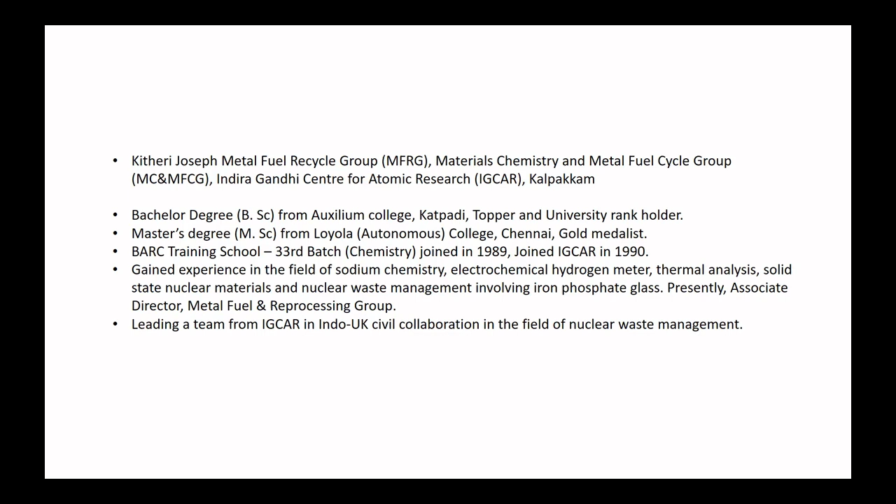So you are, did I pronounce your name correctly? One who will teach us how we take the nuclear fuel from light water reactor to fast reactor. When I was working in BARC, that time we had all light water reactors and fast reactor was being built in Kalpakkam. So now that is the next step you are going ahead.

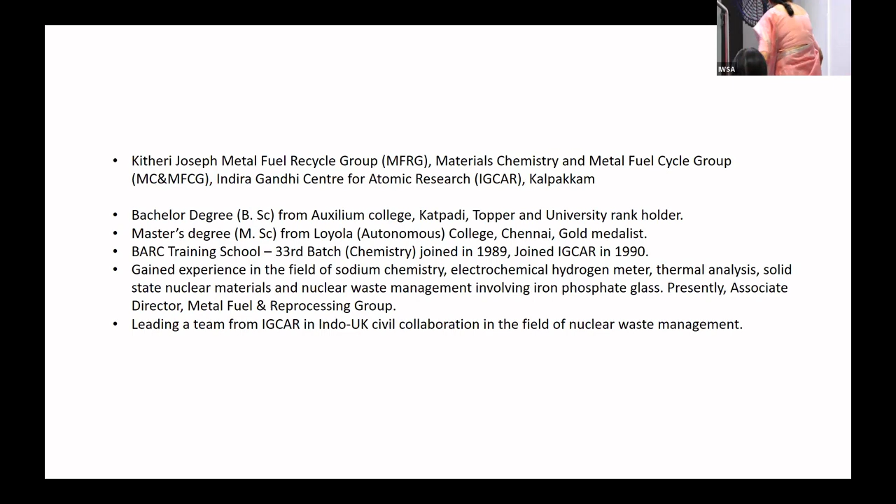And let me read a little bit of your biodata. Kitheri Joseph, Metal Fuel Recycle Group, materials chemistry and metal fuel cycle group here, and Indira Gandhi Center for Atomic Research, IGCAR, Kalpakkam. Somehow we think IGCAR is an extension of BARC.

So you did bachelor's degree from Auxilium College, Katpadi, and you were the topper and university rank holder. Congratulations, my dear girl. Master's degree from Loyola, Chennai, you are a gold medalist. Wow, so always a topper throughout.

And BARC Training School 33rd batch of chemistry joined in 1989. So I am from 12th batch, so most probably I might have taught you Fortran, I don't remember, or not. Normally it was a routine for me to teach Fortran to all training school youngsters, so that's okay.

Then you joined IGCAR in 1990 and gained experience in the field of sodium chemistry, electrochemical hydrogen meter, thermal analysis, solid state nuclear materials, and nuclear waste management involving iron phosphate glass. Presently, you are the Associate Director, Metal Fuel and Reprocessing Group. Once again, congratulations for that, because being Associate Director is a no mean feat in a man's world.

Now, is it a man's world or is it going to be women and man's world together? That change has to be there. When we were there, it was totally men's world, and somewhere we were hiding here and there, and they were trying to be very gallant to us. I remember, don't walk too fast, Mrs. Mahajan, we have to open the door for you. Arey, what is this? I can open the door myself. It used to be like that, but I'm so happy that now it has become equal, men and women.

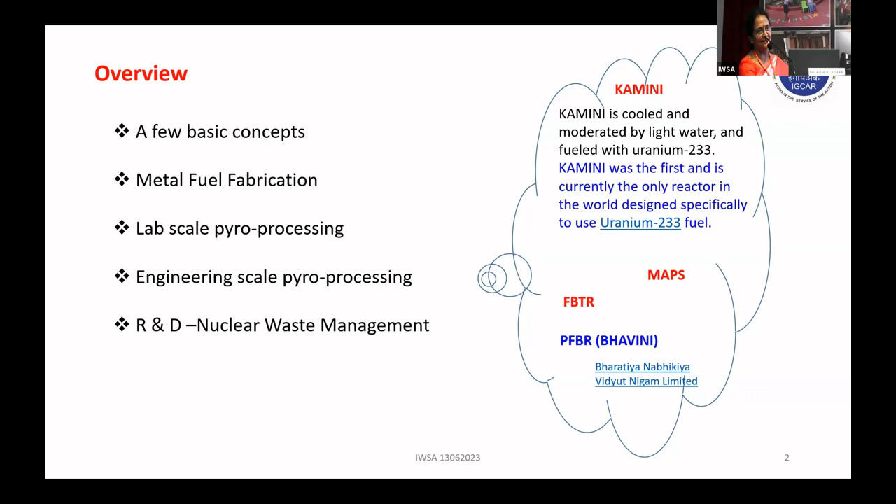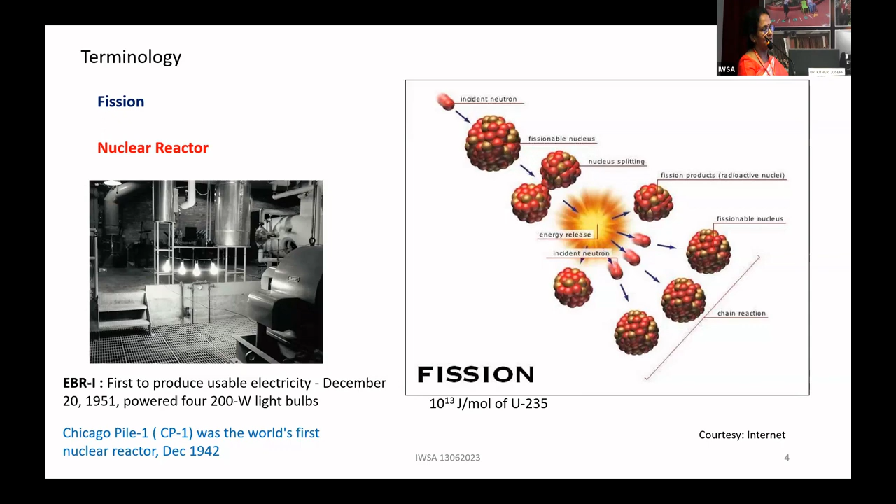A few basic concepts which you all know, that fission is through which we get the energy. I'm not going into the details of that, but since we are interested in breeder reactors, that is fast reactors, the first experimental breeder reactor EBR1 was constructed in December 20, 1951 to power four 200 watt light bulbs. That is the actual history. You can see now where we are. And the first reactor as such is Chicago Pile, which was in 1942. And I go into my topic straight away.

As I've informed you, we are interested in metal fuel.

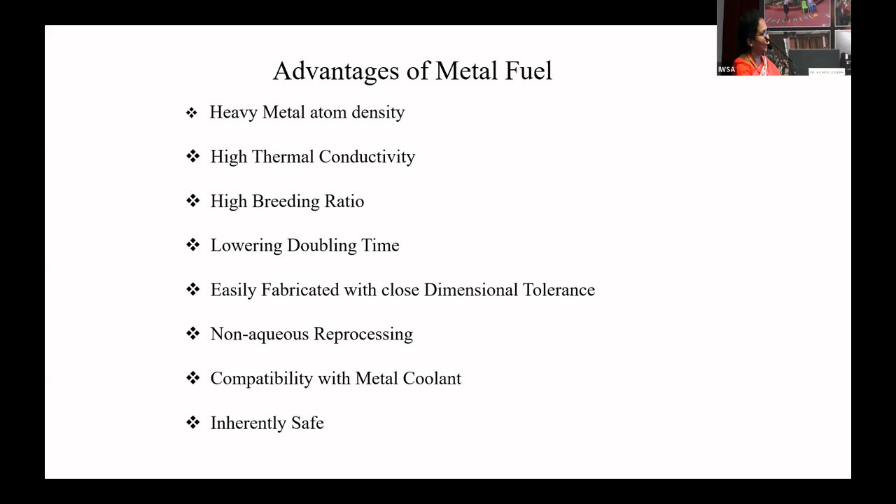What are the advantages of metal fuel? Heavy metal atom density, high thermal conductivity, breeding ratio is higher than oxide fuel, lowering of doubling time, easily fabricated, and it can be made with close dimensional tolerance. We go for non-aqueous reprocessing, compatibility with metal coolant which is sodium, and above all, it is highly inherently safe.

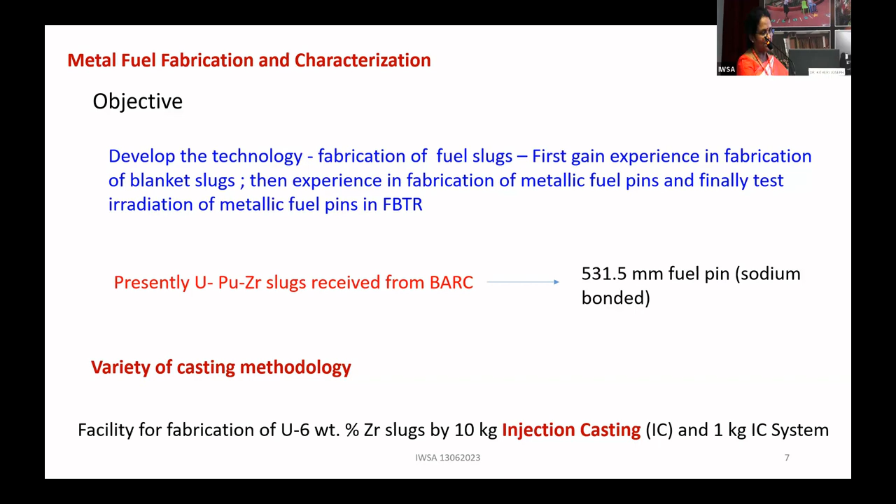What do you mean by injection casting system? Just imagine yourself having a cup of soup or juice, and you're trying to pull it through a straw. That's the basic methodology you can think of. But the entire process happens at very high temperature under closed environmental conditions.

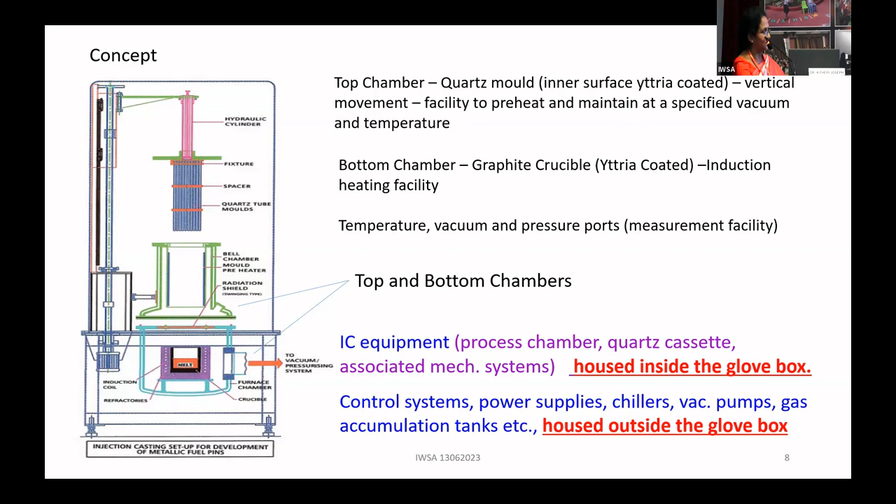The process consists of: yttria coated graphite crucible. Yttria is the most stable oxide which will not interact with uranium, plutonium, and zirconium, so you coat it with yttria - that has its own technology. Then you have a quartz tube which will be inserted at 1450 degrees. The internal diameter, 6 mm, should be coated with yttria on the quartz.

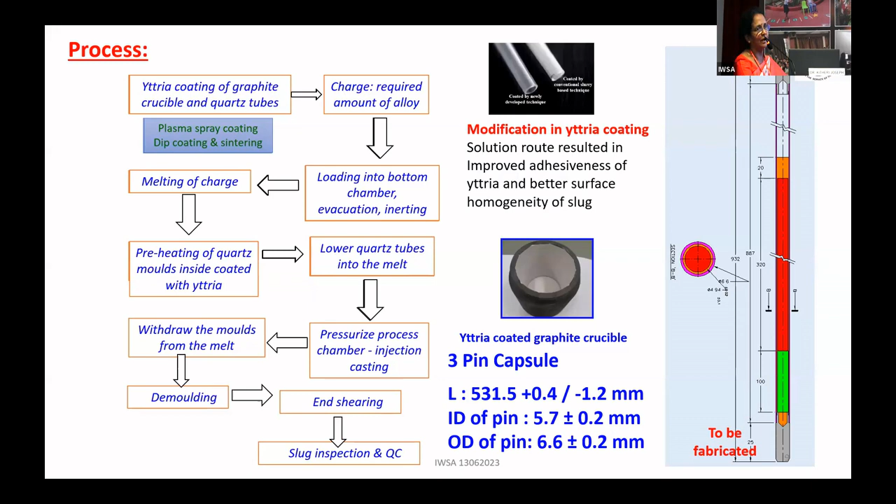All this process has been done inside IGCAR only. Finally, you pressurize the injection chamber, allow the melt to rise inside the quartz tube, and then cut it open to get the slug. The moment you get the slug, you have to go for quality check: metal feed, induction melting, demolding, characterization.

You should have physical, chemical, as well as metallurgical characterization. The moment it is not qualified, you recover the metal and redo the casting. If it is qualified, put it in T91 clad tube, sodium extrusion, slug loading, end-plug welding, sodium bonding. The fuel pin is characterized again, and the accepted fuel pin goes for assembly.

As you can see, uranium cleaned one is shown here, and the slug which is cast, uranium zirconium slug, is also shown here. For non-metallic impurities, oxygen should be less than 85 ppm - actual spec is less than 100 ppm - and carbon needs to be less than 5000 ppm as per specification, but what we get is less than 1000 ppm of carbon.

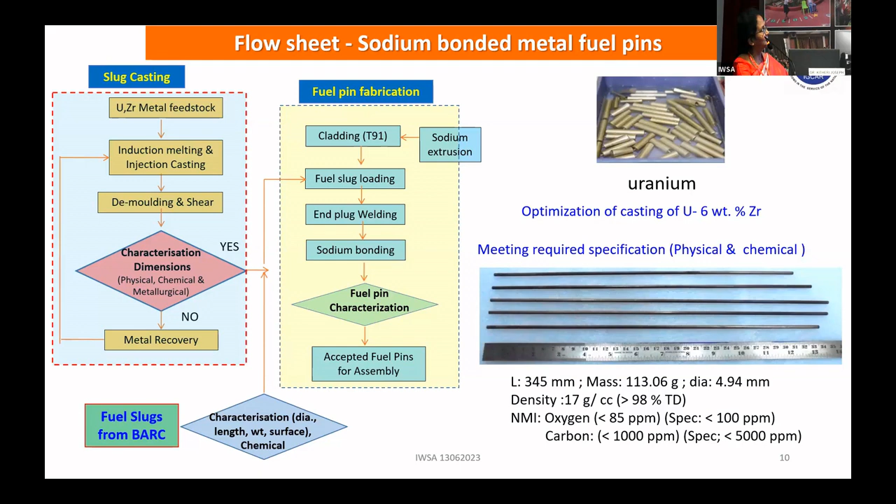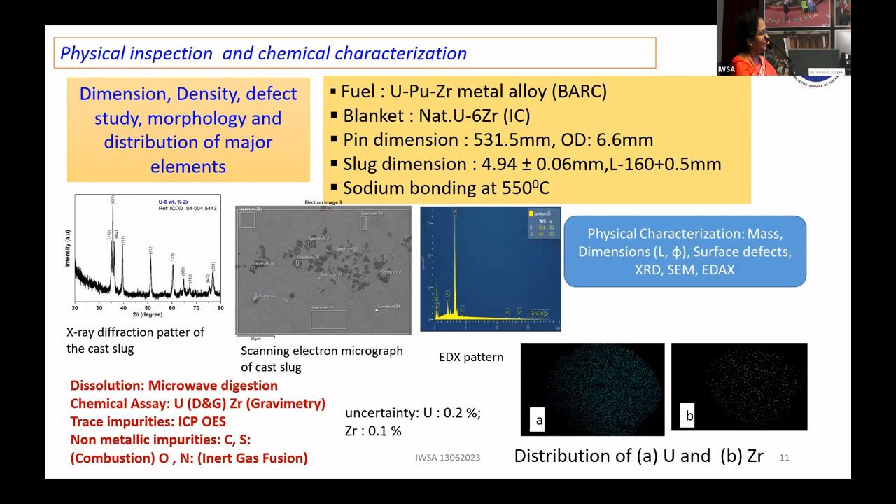As I mentioned, we need to go for all the characterization: XRD to check whether it is UZr, U-6%Zr, metallurgical characterization, and checking dimensions and surface - everything, including mapping the distribution of uranium and zirconium to prove it is uniform. In addition, we do chemical analysis of the ensured material. The uncertainty in uranium is around 0.2%, and the uncertainty in zirconium is around 0.1%.

Next, we show the entire system. The 1 kg injection casting - all trial runs used copper - and we have one more 10 kg system also. Sodium wire extrusion, sodium bonding, slug retrieval facility, and the characterization lab for non-metallic impurities.

Cutting and polishing machine, all inside the glove box. You can see the molten alloy, how it looks at 1450 degrees centigrade, and the entire system needs to be under high purity argon. So you require an argon recirculation and purification system, with oxygen level needing to be less than 20 ppm.

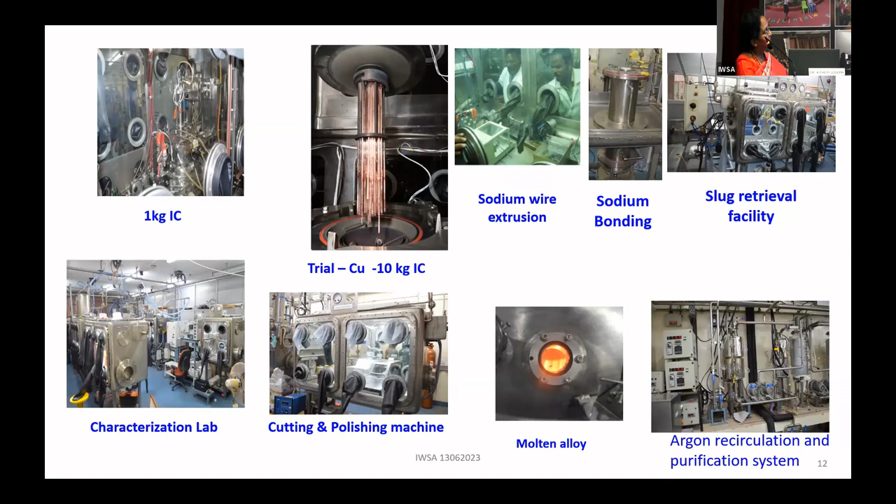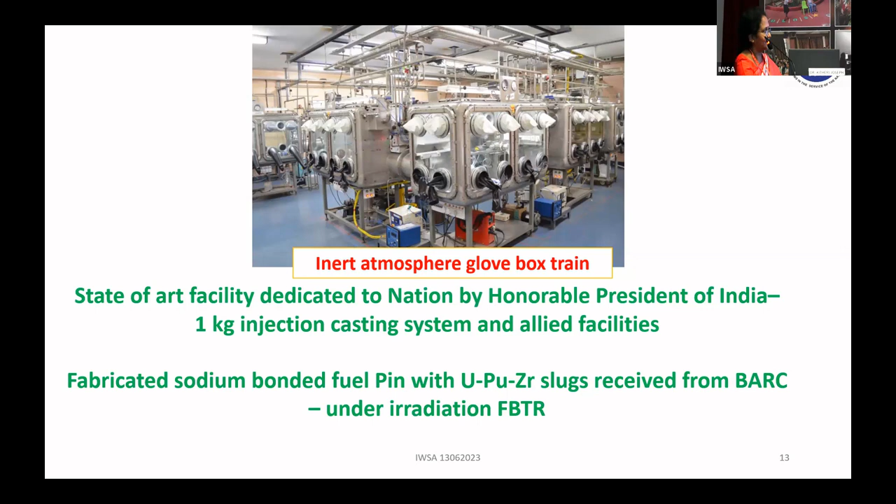This inert atmospheric glovebox train has already been dedicated to the nation by the Honorable former President of India, Shri Pranab Mukherjee, along with the 1 kg injection casting system and all allied facilities. We received the U-Pu-Zr slugs from BARC and made U-Zr blanket slugs, which are now under irradiation in FBTR.

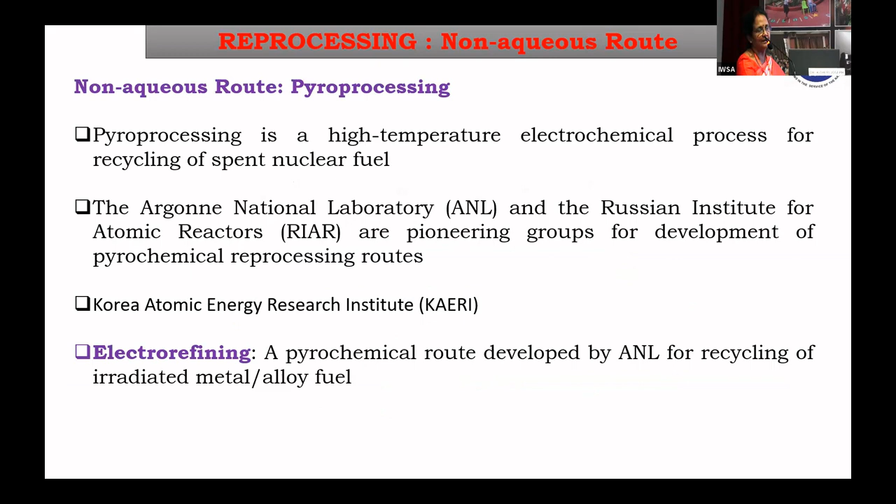The next topic is pyrochemical processing, at lab scale and engineering scale, which is a non-aqueous process based on electrochemistry, specifically electro-refining. The fission-product-containing spent fuel is taken in the anode basket, and depending on chloride stability, lithium chloride, potassium chloride along with uranium chloride are taken as the electrolyte. You have a solid cathode as well as a liquid cadmium cathode.

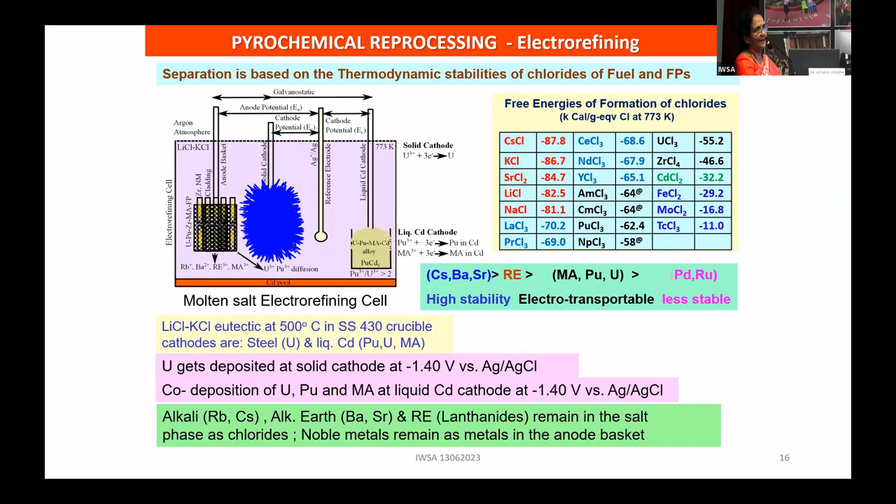Through electrochemistry, by controlling the potential, you can deposit uranium at the solid cathode. The remaining uranium, plutonium, and minor actinides can be electrochemically deposited in the liquid cadmium cathode and removed. The alkali and alkaline earth chlorides, having the highest stability, remain in the molten salt. Minor actinides and plutonium, being electro-transportable, go into the cadmium cathode and can be recovered. Uranium alone, by controlling the potential, can be deposited at the solid cathode, shown as the blue material there. The noble metals remain in the anode basket and can be recovered.

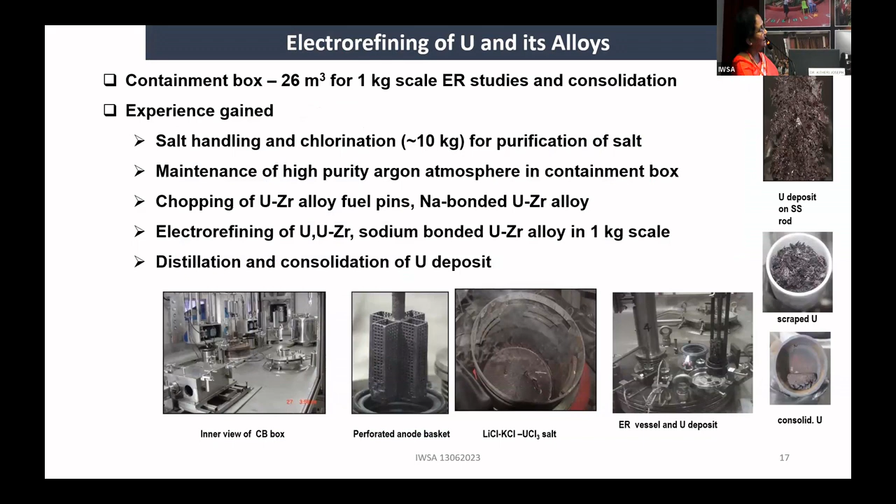This relates to what we normally call a double module glovebox. This particular system, you can imagine, is a 26 cubic meter containment box which has all the facilities to handle highly moisture-sensitive molten salt, allowing you to deposit and recover uranium, induction melt it, and make it into uranium alloys.

The next is the engineering scale. I mentioned the double module glovebox, and then the 26 cubic meter box. The present engineering scale facility is one of its kind in our country, corresponding to a 500 cubic meter containment box. People who visit IGCAR, please check this facility also. This has a 500 cubic meter containment box, and you have to maintain a stringent environmental condition.

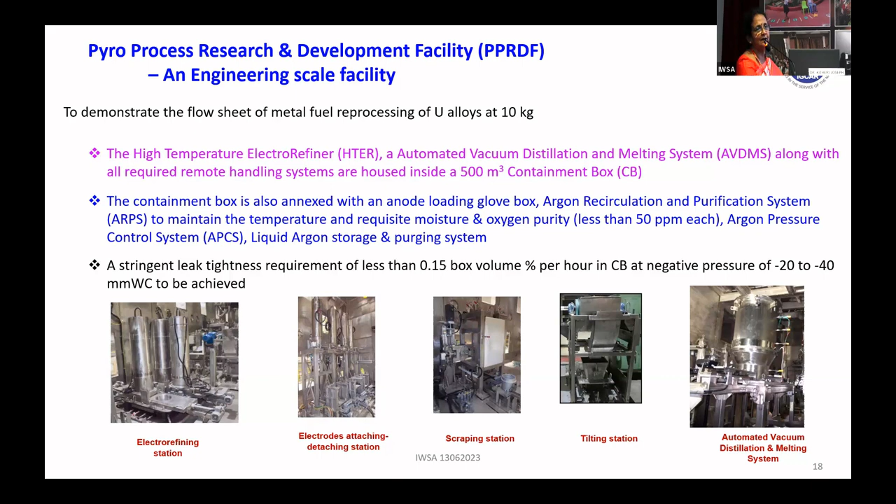The oxygen level and moisture level need to be less than 50 ppm, and all facilities have to be remotely handled. So we wanted to have that experience before going into the hot cell. We went ahead with this construction, which includes the electro-refining station, electrode attaching/detaching station, scraping facility, tilting of uranium with salt, and automated vacuum and distillation facility to distill the salt as well as melt the uranium. This is the containment box which consists of the entire unit, which is 500 cubic meters.

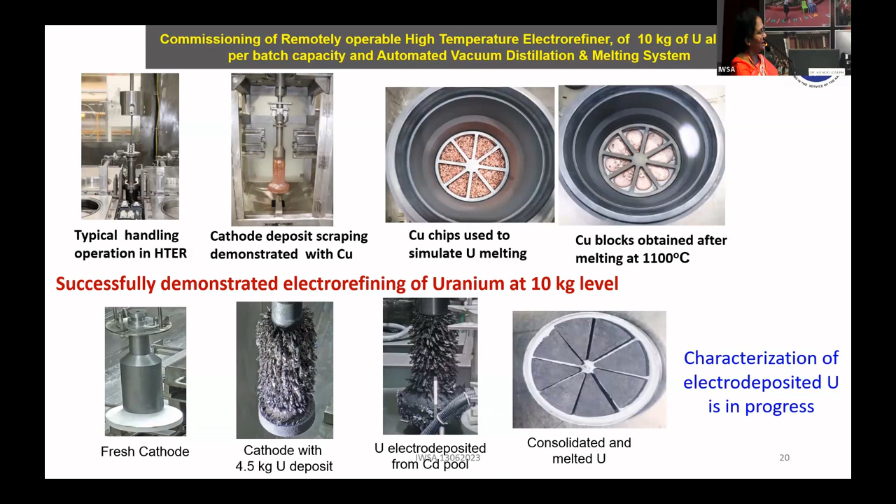We have prepared 1 ton of salt of lithium chloride and potassium chloride, with stringent purity, as you can imagine. This is through 10 kg level pyroprocessing with remote handling experience. Before starting with uranium, we always do cathode deposition with copper first. You melt it, form the copper blocks, and you can see the fresh cathode shown here, and the cathode with uranium deposit in the cadmium pool. All of this has been consolidated.

And next, on R&D, in another 5 minutes I'll be able to cover it.

On nuclear waste management, you all know BARC works for light water reactors, and IGCAR, our center, is oriented towards applied work for fast reactor waste management. So why are we interested only in high level waste? High level waste means you have to store it in a solid form, which can be ceramic, glass ceramic, or a composite.

We go for vitrification, which is glassification, because of its industrial process viability, and the literature shows it is industrially highly viable. You have to take care of durability - chemical, mechanical, thermal and radiation stability. You should have a lower liquidus temperature so that you take minimum time for homogenization, better waste loading, and accommodation of all the required composition.

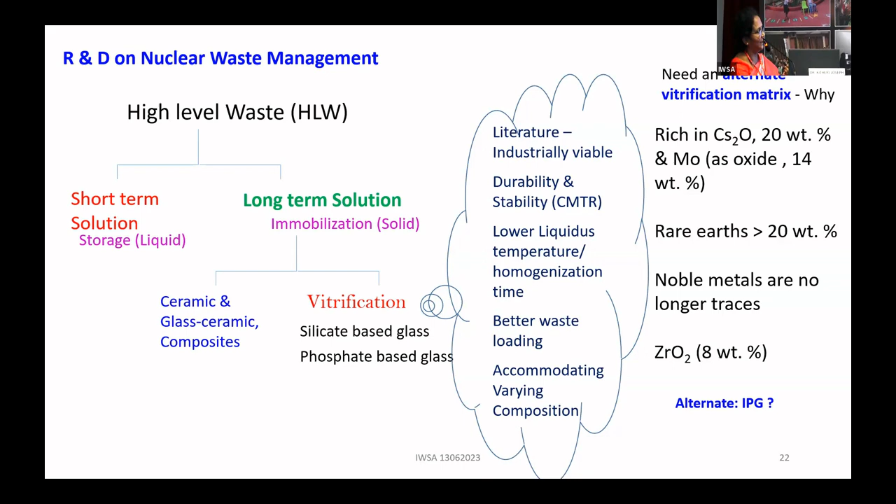With respect to fast reactor waste, where cesium and molybdenum content is very high, borosilicate glass is not a suitable matrix because it can take a maximum of only 2.58%. Whereas iron phosphate glass, an alternate matrix, can take one order higher - 25% can be loaded, and the salient features are shown here. There are certain ways it can be loaded even up to 50%, though the number of glass formers and modifiers are very limited. Although all phosphate glasses are corrosive, iron phosphate glass is an exception, and it is commercially feasible with normal joule melters.

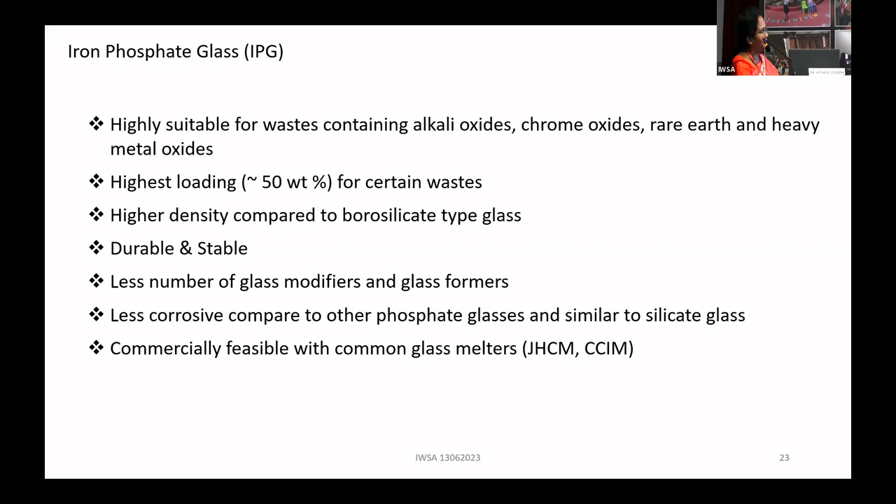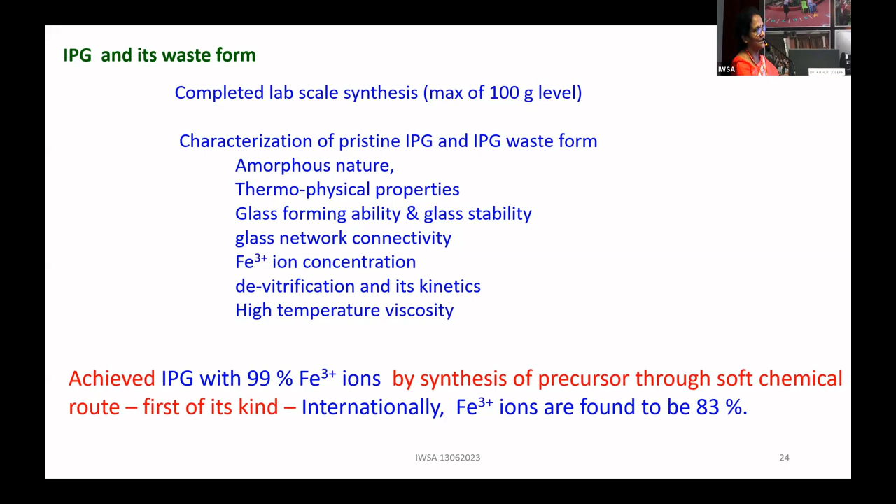And these types of works have been done on an R&D scale. All the characterization with respect to thermophysical properties, forming ability, glass stability, and this itself is one typical topic which can go for 1 hour. But what we would like to tell you is why this Indo-UK program started: because we were able to give an iron phosphate glass with less than 1% of iron 2+ concentration, which internationally they could not do. They could only get up to 17% of iron 2+, whereas we achieved through a soft chemical route 99% iron phosphate glass with iron 3+ ion.

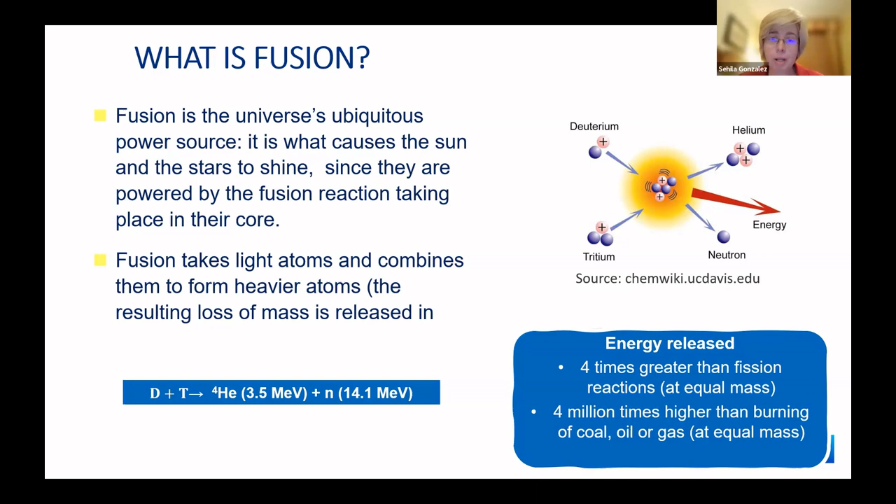So which are the physical principles? Two light nuclei combine to form a heavier one. The easiest fusion reaction to do on Earth, which is why I would say 90% of the concepts are based on it, is deuterium and tritium. The whole thing is to join these two nuclei to get a heavier one, helium, and produce a neutron. Is this process happening? Yes, it's the process that takes place in the stars. In the 1920s it was proposed that the mechanism powering the stars was fusion, done within a plasma.

Probably you are familiar with the meaning of plasma. Plasma is an ionized gas, which you need to put at high temperature to have this fusion reaction. In the sun, you have a really high temperature where all particles, positive and negative, are at a certain pressure, with certain density, for enough time to have this fusion reaction. So fusion and plasma go together. You need a plasma to make the fusion reaction possible, but it's not the only condition, as I will show you later.

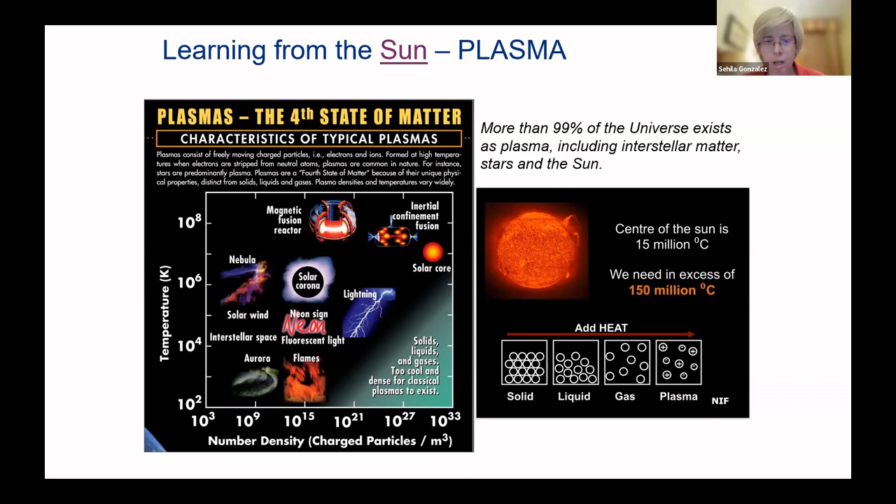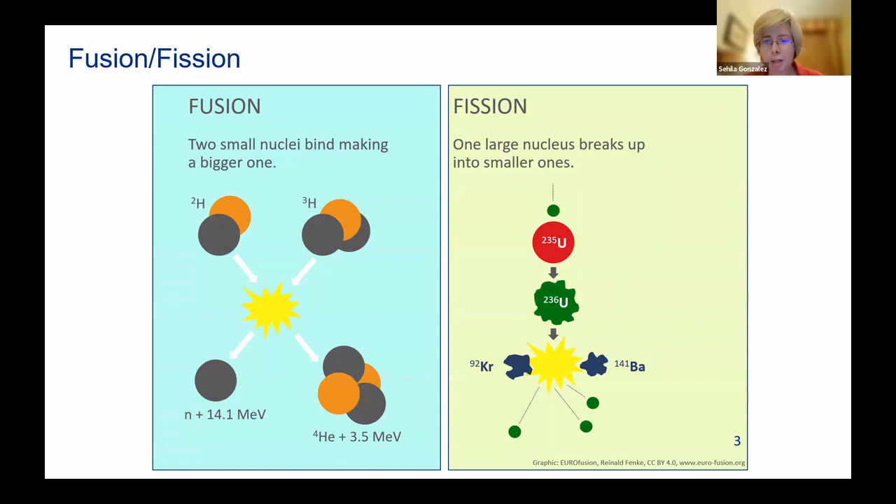So we have now understood that fusion is the joining of two light atoms. Deuterium and tritium is the easiest one, and you have helium and a neutron with certain high energy, 14 MeV neutrons. And fission is where you have a large nucleus that breaks up into small ones because of the impact of a neutron, having as an outcome some a little bit lighter elements and more neutrons that are the ones that can make this chain reaction possible.

In fission, the fuel is uranium and plutonium, so we all know the problems associated with the handling of these kinds of materials. In fusion, what we have is isotopes of hydrogen. I don't want to cheat. Tritium is also radioactive, but has a lifetime of 12.3 years, so it's much different from uranium and plutonium.

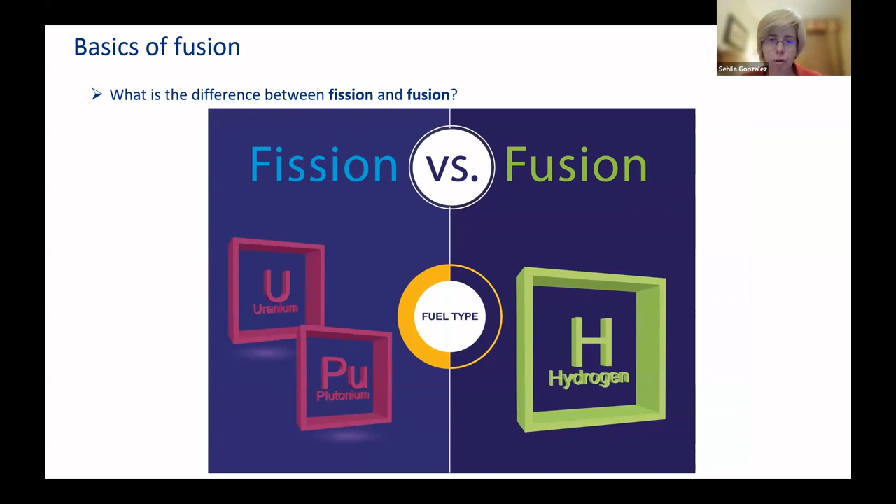Also, in fission, you have high-level rad waste. In fusion, you have low-level rad waste. It's not true there is no production of rad waste. This is something that we need to understand. But it is very true that the level of radioactivity in fusion and fission is completely different. In fusion, you don't get more than low-level rad waste. In fission, you have these transuranic elements, and so you end up having really high-level rad waste.

One good feature of fission related to fusion is that it is a reality. There are now fission power plants that are working and producing energy to the grid. Fusion is still under development, and let's hope to have this new source of energy soon. But as I said, it's still to be proven, to be done on Earth by human beings.

So how can we produce that energy on Earth? Because we have seen it's a natural process, it's the one that powers the stars. We need to have this plasma, as I mentioned before, and we need to reach very high temperatures to provoke the high energy collision of the nuclei and have these reactions. We need to have enough density to increase the probability of these collisions occurring. And this has to be done for long enough time to have enough fusion reactions. So this high temperature, particle density, and confinement time is known as the triple product.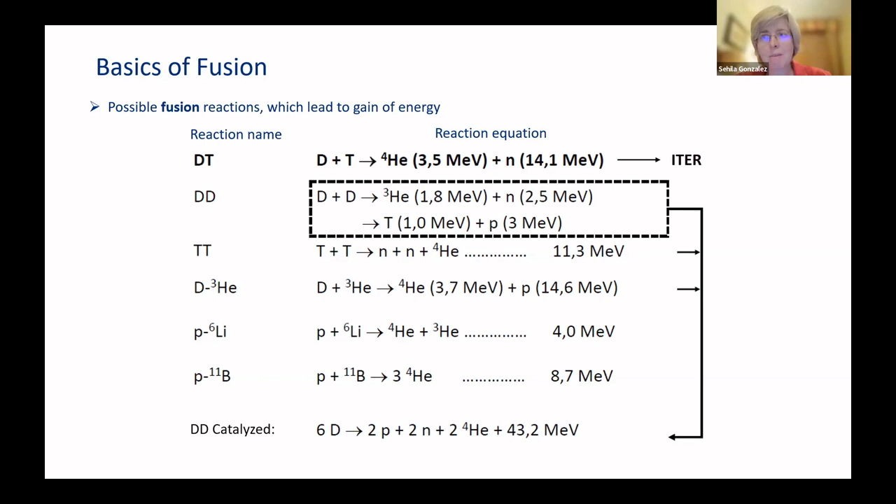The deuterium reaction that you have here in this slide, also highlighted, is the one that is powering the sun. It's less efficient than deuterium-tritium, and this is one of the reasons why the sun will be shining for longer, because this reaction is less efficient. Otherwise, the lifetime of the sun would be shortened if it were deuterium-tritium.

And when you get this reactor condition, it's called ignition. Ignition means that you have a fusion reaction, the deuterium-tritium reaction, for example, and you are able to keep the reaction self-heating. So you don't need to add extra power into your machine. This is achieved when the level of fusion reactions produced in your plasma is high enough that all these helium particles are able to self-heat the whole plasma and keep the reaction going. To achieve that is ignition.

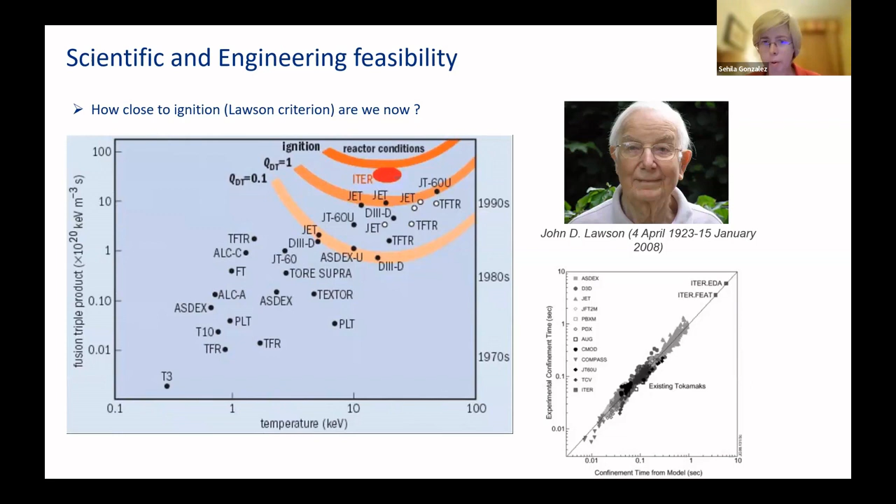And that was proven to be done on Earth for the first time only a few months ago by Livermore National Lab in an inertial fusion machine. So until 2 or 3 months ago, that was not reached on Earth.

I don't have too much time, so I want to give you a brief overview of the different concepts. Fusion is still under development. As I told you before, we do not yet have a machine producing fusion energy and putting it in the grid, so a number of different approaches are pursued. Gravity is the one that the sun is using, so we cannot replicate it on Earth. It's just for reference. This is how the sun confines the particles thanks to gravity, but we need to do it on Earth by using other methods, usually magnetic fields.

You have the approach of inertial fusion, where lasers heat up a target to reach this high temperature and then the implosion. Then you have magnetic confinement, which is the most popular approach. It's not the only one, but it's the most popular, where you have a toroidal machine where magnets produce magnetic fields to confine the charged particles, and you create currents inside, which makes the density of the plasma increase because you have this double confinement in the case of the tokamak, and then you can reach these conditions.

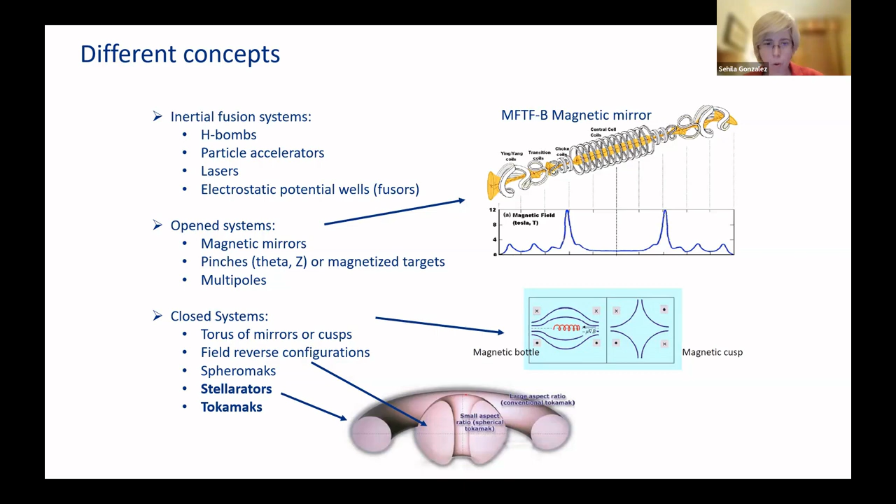There are a number of different approaches. You have inertial fusion, which also has some military applications, as you can see here. You have open systems, magnetic mirrors, pinches and multipoles. You can Google it and see how they work. It's a whole family. And then you have the closed systems, mostly toroidal machines, where you have stellarators and tokamaks, which, as I say, is the most popular one. 90% of the machines proposed right now are based on tokamak designs.

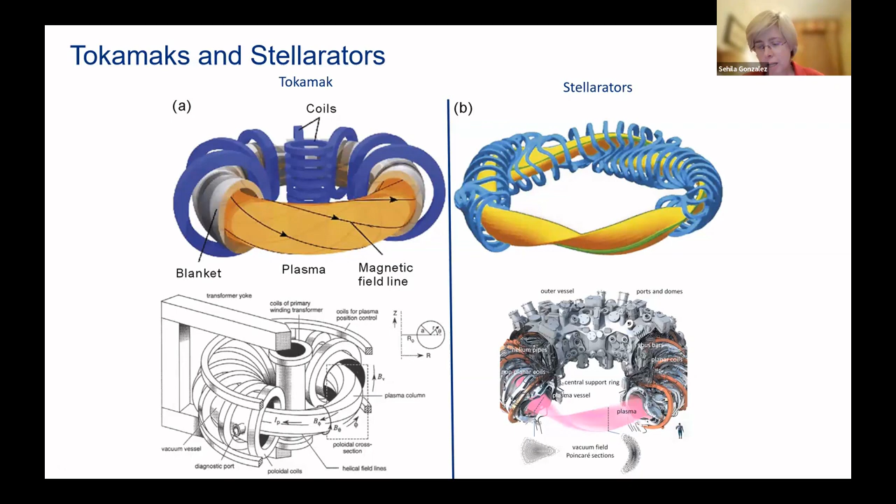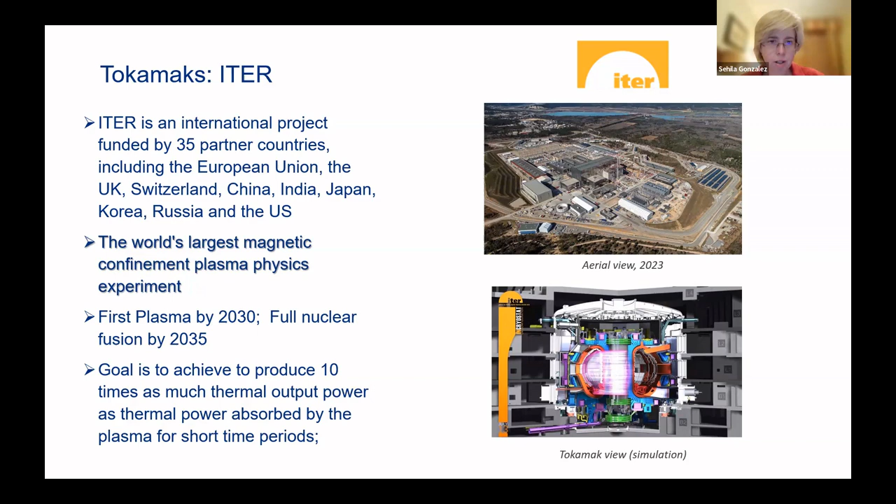The first plasma was expected by 2030, maybe a little bit later. And the ITER colleagues say that they intend to achieve full nuclear fusion by 2035. They are now revisiting the plans, but let's say in the 30s. It's an international project. You have 35 partners, and they are all working together to put this machine in place. It's a technological challenge, a coordination challenge, a logistic challenge, a challenge in all aspects. But the project is moving, and I'm really confident that it will produce much more than is on paper today.

So what is beyond ITER? Because now you have an explosion of new concepts, new enterprises, new prototypes, and people promising fusion in a few years, which is good for the whole community. The first thing that we need to understand is ITER is an experiment. ITER will not generate any megawatt to the grid. That needs to be done by the next step. It's a DEMO or prototype or whatever you want to call it.

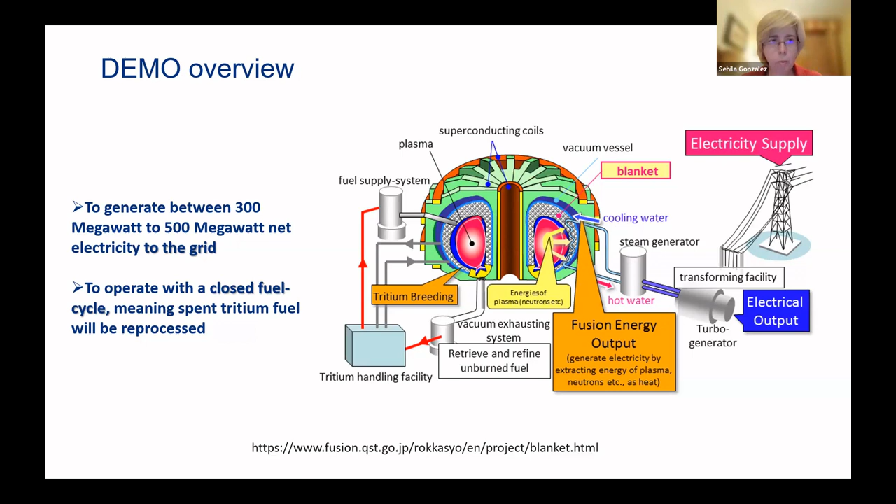The next machine will have to produce some megawatts of electricity to the grid, and it has to operate in a closed fuel cycle. That means that the tritium that you need to fuel the machine needs to be produced in the machine by a breeding process with lithium. So these two things are not going to be done in ITER. This needs to be proved by a DEMO prototype machine. There is a European DEMO project they are working on, but in addition to that, there are a number of private enterprises.

We want to be the platform of everyone who has something to say related to the role of women in fusion, to offering mentoring, to provide the chance to have networking, etc. And again, our aim is to be a global platform. So whatever event that you can do, whatever thing that you want to promote, contact us and we will do it from our website and through all our resources. So we have a global presence.